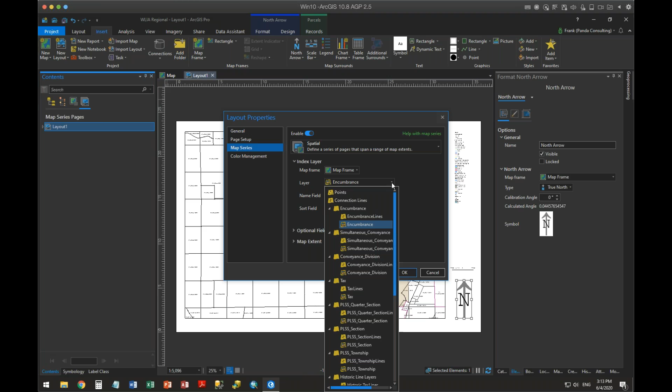And then what layer do I wish to use for my index layer? An index layer is a series of polygons that are used to define where those pages are going to be. In this case, I'm going to use my PLSS layer here. And then what's the name field? What's the name going to be? What's the sorting field on here? And I can look at optional fields, for example. I can put whether or not there's groupings, whether it groups these into individual ones.

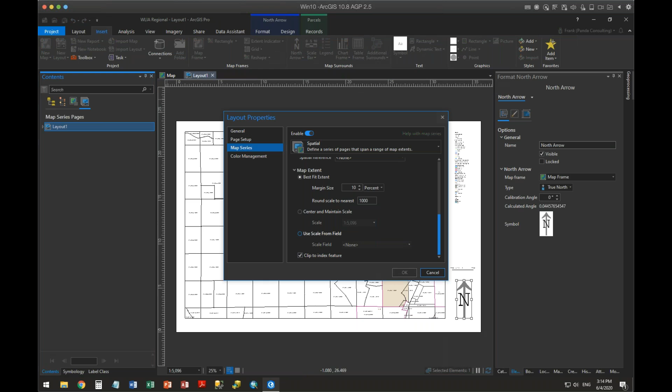I can look at map extent and it'll tell me, okay, how are we going to handle the map extent? If I want to be centered and maintain a certain map scale, I can click here and tell it what it is. I can say get it from a field or clip to that index feature. Right? It used to be that you had to go through some tricks to clip things. Well, now I can say clip it, but make sure I've got a 10% here. All right. And then I can click OK on this. And there we go. Click OK on this. And in fact, it creates my map series.

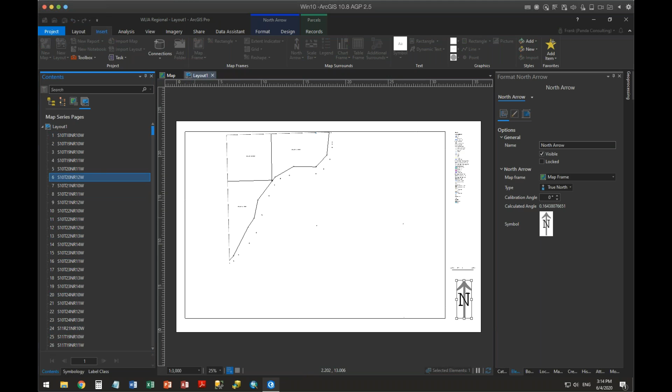Works pretty much the same, but there's that little key. How do you turn that thing on? It's not obvious. So now I can go down here and I can click on this page and it will pull up that page. And if you note, I told it to clip anything outside of the section is what I did on here. So you're only seeing this one section here at a time. And again, you have the same thing with dynamic text on here. You can tell it what section this is by putting up the page name on here.

So again, it works pretty much the same as it used to inside of ArcMap. Again, it used to be called data-driven pages. Now it's called map series on here, but there's other enhancements. Wait, there's more. So if I go to geoprocessing, I can actually look to my toolbox, and there is now a cartography toolbox. All right, that is specifically set up for map series, which allows you to do things such as calculate adjacent

fields so that if you have dynamic text hanging around the edges, you can say automatically calculate what's on the right and the left and the top and the bottom of this, so you can go and put that frame up there. All right, so you can put that dynamic text and say, this is the section to the east here, this is the section to the west, to the north and the south. You can calculate central meridians and parallels if you want that. You can put grid convergence angles in, a UTM.

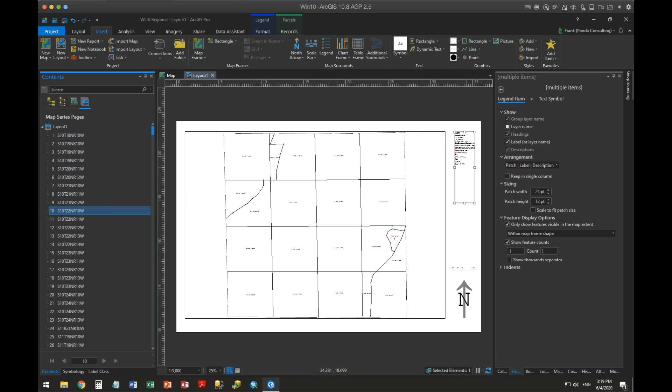It may be that someday we have to do a deep dive on this. Right now, I just want to introduce you to this, one of the things that's great here. They have made some really nice improvements. So if we go to another area here, you'll note my legend changed because I no longer had subdivisions in there.

All right, so are there any questions on the map series and some of that functionality that's in there now?

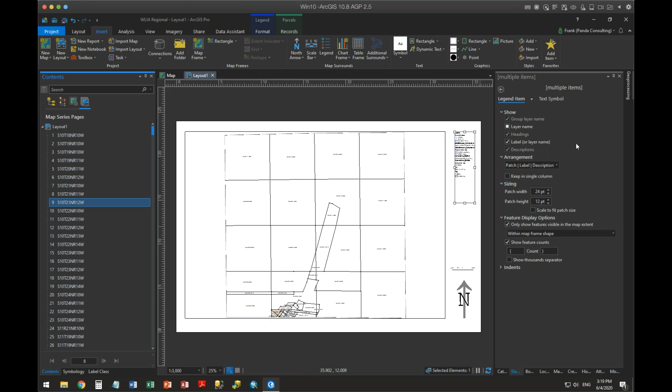So I could go in here and do this, let me see. I think I go to Share to go to printing on this. Let me see, layout, export this layout, no, print this layout. Since it is a map series, what's going to happen? Yeah, I haven't looked at this very often, so I probably shouldn't have gone down that rabbit hole as far as how you actually print these things out.

But we can explore that at some other time. Your layout's on the right there. It's set to letter and portrait right now. So, oh sorry, thank you, thank you.

Yeah, number of copies, tiling, output, map series. There we go. How many pages I want to do, what ranges I want to do of them, print them to a file. If I want to go and print them to an individual file, then I tell it what the file name is. By the way, an interesting thing I found with Pro is that they used to have a pull-down where you would tell it what type of file it was. Now all you have to do is put the suffix of that registered application on there, so you would say, well, this is a PDF, and boom, it'll do that and go from there.

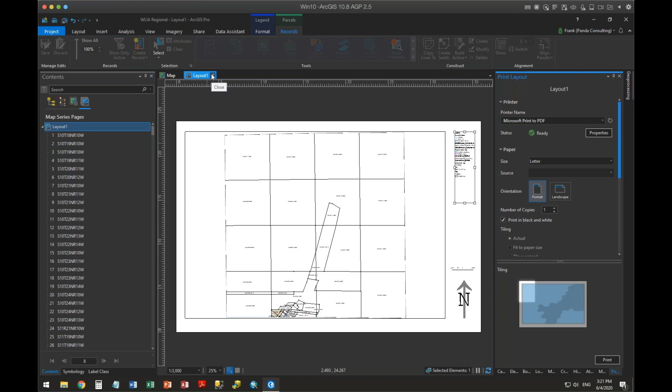All right, so I am going to remove this layout from here, and we will go from here. I can close that out. And now go back out to here. Let's go to this, go back to a view.

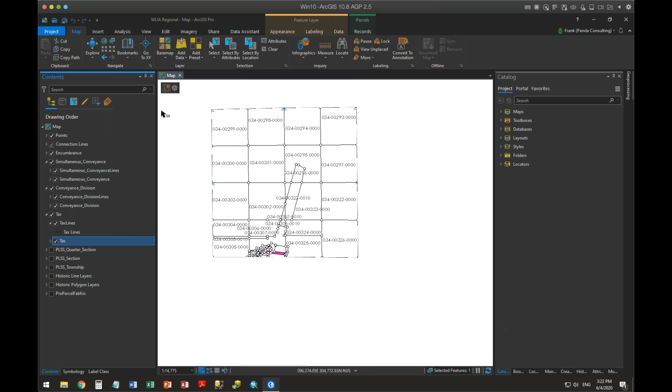I obviously was way out there before. Oh, this is interesting, I only get that one area that I just trimmed out. You're still clipped. I am clipped.

Exclude these layers, current map series extent. Let's... Oh, okay, thank you. I'm just going to cancel out of here, no changes, and go back in.

All right, Brian says it's not possible to convert a map book to a map series in Pro. However, the data-driven pages used to create the map book can be exported to Pro to create a map series. Right, that's kind of what I thought. It actually will bring in those data-driven page settings. Is that correct, Brian?

Yeah, all right. He says correct. Correct, awesome. Thank you, Brian. Yep, all right.

So the question was, what do we want to explore today? My thought is that one of the things we might explore is the Traverse tool a little bit more. A lot of us do a lot of editing and such on here. The other option is that perhaps we can explore a little bit more about correcting misalignments and things of that sort.

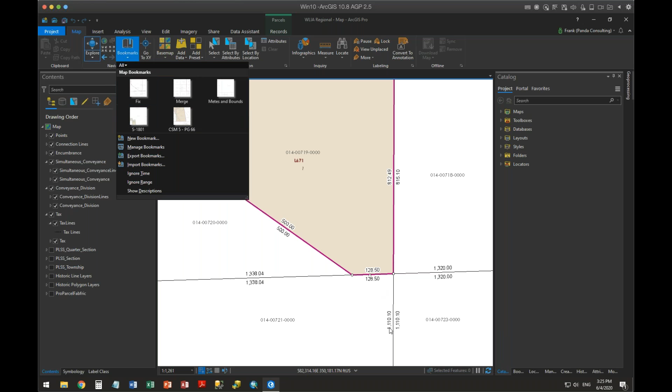Let me see if I have any bookmarks in here. I have a fix for this. Oh, Chris says Traverse first, then alignments. Okay, looks like we have more votes for alignments though. Yeah, let's start with real simple things.

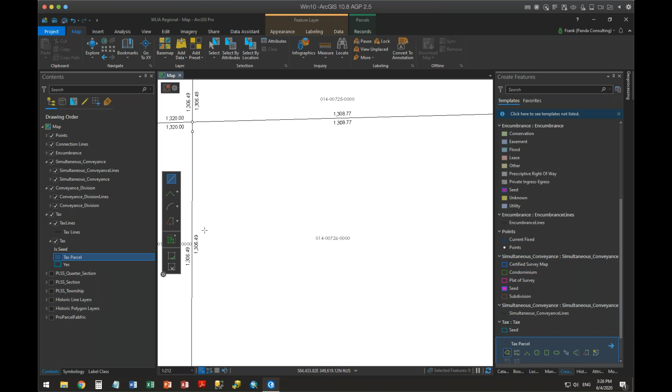Let's go ahead and I'll create some pseudo misalignments in here. I will go in here and create some polygons. I will create tax parcel polygons, and I'll create in here just some major misalignments.

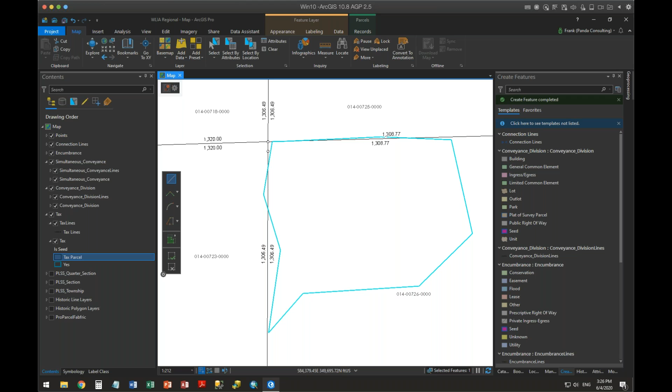So depending upon what you've done so far or what sort of data structure you're working with, some of this is fairly easy, some has specific tools for it. For example, I right now am in an ArcGIS parcel fabric, but I'm going to treat these just like plain old polygons since I'm not going to create any records, and say, how do I make sure these things align themselves?

So what I'm going to do is go over here and set this to be map topology under my edit tab. This is what I want to do - I want to use map topology on this. And when I go to modify, let's use the align features tool, not align parcels. This is our go-to for correcting misalignment areas.

Now this alignment tool also does things like replacing geometry, but for the most part we'll use this for correcting alignments. So the key here is you want to determine a tolerance, and I'm just going to put a 5-foot tolerance in here.

And then using my simple tools, I'm going to draw a line and say this line here, with a 5-foot tolerance - go ahead and realign all vertices that are within 5 feet of that path I just drew and bring them in.

I'm first going to create this down to 2, just to show it. I'll go back and do it again at 5 to show you one of the problems you might have. So at 2, I have options - almost always you want to fit your shapes to the path. And then on each side, do you want to go on both sides or one side? This is pretty advanced.

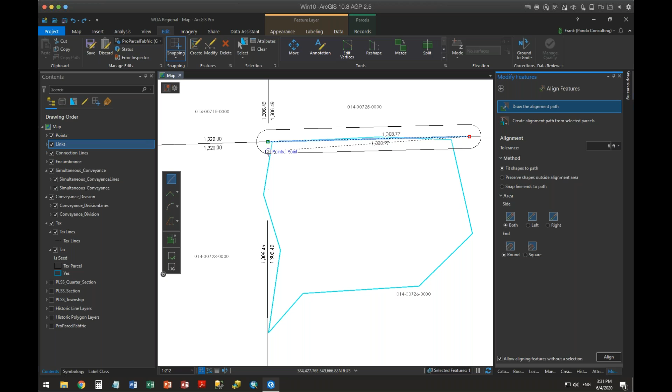Now notice when I move that buffer out to 5 feet, there's another vertex there, there's another point there. And when I click here, it's going to go - actually, let's go back to edit vertices here. It actually eliminated that vertex there on here. It didn't just move it in there, it eliminated it.

Now, because it should not have allowed me to do that because I got rid of a line. Wow, all right. So again, you want to be careful with that because there are certain rules - if I go and eliminate... well, I didn't have a record on. Sorry, I'm thinking to myself as I'm going through why it's doing that.

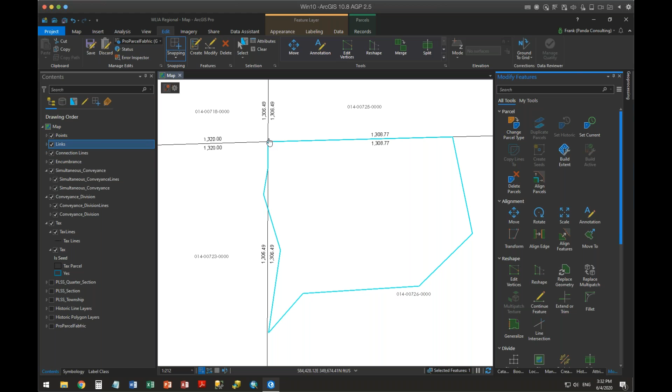So when I did that and I included that outside, it eliminated all the vertices in there and it redefined everything in there. If I was actually doing this with a record, it would give me an error message saying you're going to be eliminating lines and you can't do that. So I have to be careful with that.

The align feature tool is actually very, very nice in that it kind of is a replace and allows you to go, for example, and take polygons that have densified curves and correct them. But there's other things that we can do.

For example, I can go in here and I'm going to move back to map topology here. And instead of doing align features, I can do align edge. Now, align edge actually utilizes map topology to go and make sure that when I get in here, if I'm zooming, it's going to take whatever the solid line is and move it to the dashed line.

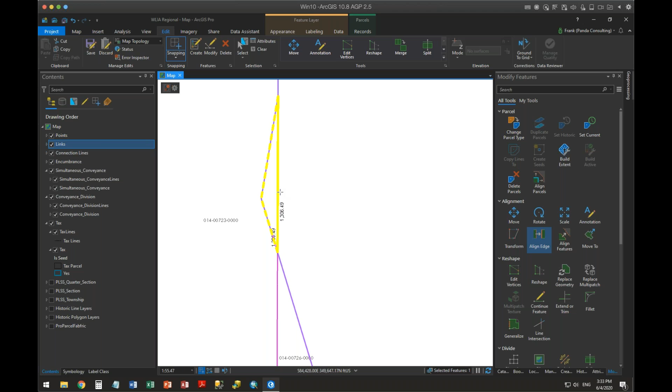So in this case, I can click here and it will go and move it to that line. Since this doesn't intersect, when I click on here, it should give me an error message because it should say it's eliminating this thing on here. Let's go and edit the vertices here. Let's make it so this thing intersects.

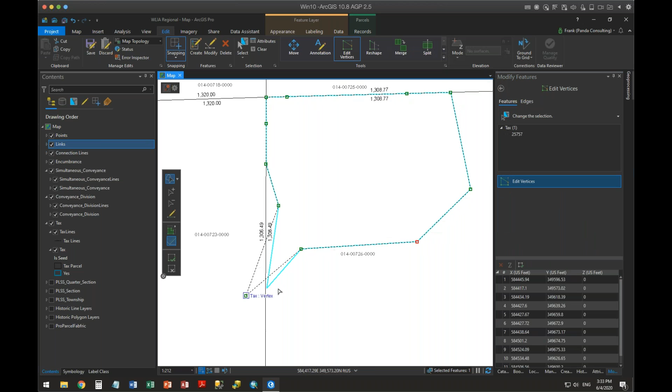All right, now go back to align edge and we can see it again here. When we hover over this line, it shows us that the solid line is going to move to the dashed area. So in this case, that will move there and this will move there. So the align edge tool is actually very nice if you've got gaps or overlaps between elements to allow you to go and align them up perfectly.

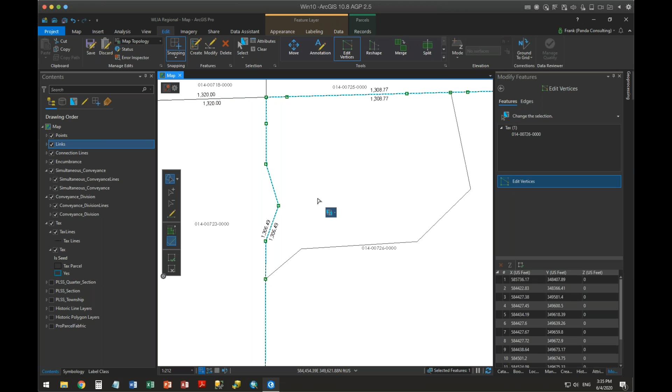And it will align it up sort of like autocomplete does, but it goes in and migrates it. So a question that I think somebody should be asking is, what did it do with the vertices of these? And in fact, you can see that it replaced any vertices and added vertices on them as it was going through.

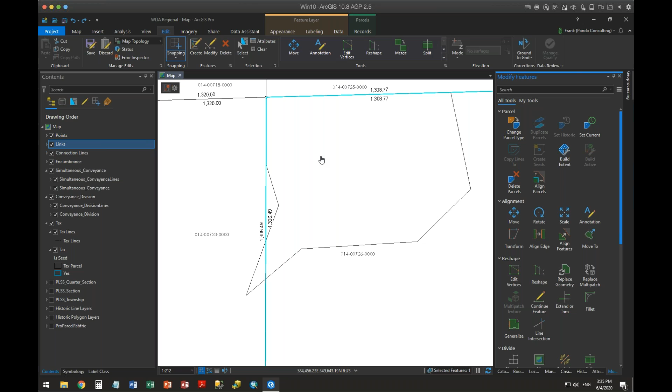So no, let's not do that. Let's just undo here. So are there any issues with or any questions about align edge or align features? Again, we love align features. It's a great tool and it works all the way through. You don't have to go and actually select anything. You draw the one path and it will go and align them all for you.

Okay, so the vertices are totally replaced. The vertices are replaced with align edge. All right, basically it creates a new edge for you. Let's sort of experience this one more time. Let's create a couple more in here.

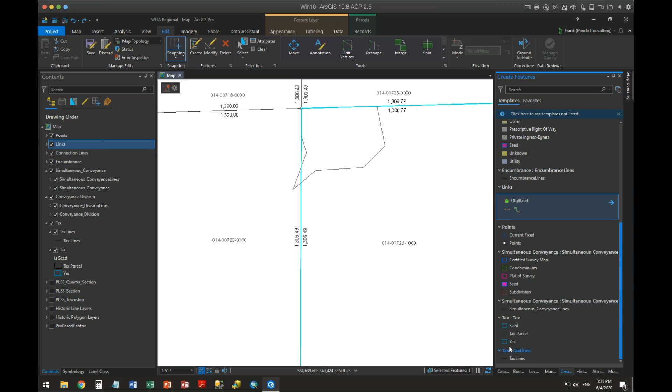All right, so again, this is using map topology when you're doing this. So when I click back here on align edge, it does an evaluation of everything that is in my current drawing extent. And then I can go in here and say, take this and combine it to here. This actually goes over this way. This will go over here. This goes and eliminates itself. This goes to here. This goes to here.

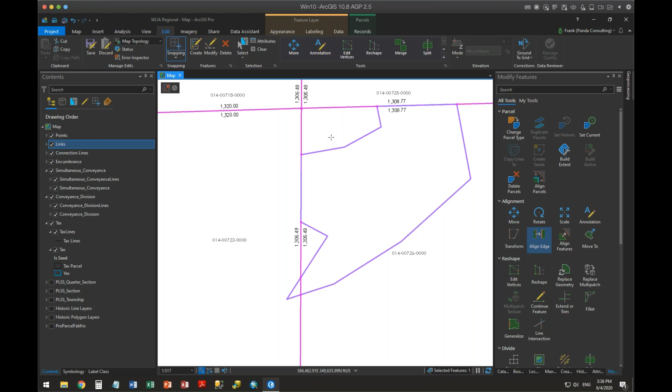Now you'll notice one of the things that I did is, because of not paying attention or however I do it, I can actually delete polygons out of this by using align edge completely. You want to be very careful with it. And one of my suggestions is if you're going to use align edge a lot, make sure that you symbolize the inside of those polygons. Make sure they have a color on them so that you can see when it disappears.

From experience, you could be aligning things that are hollow, and you don't recognize when polygons will completely be eliminated out of what they are. You want to be careful with that. Align features isn't quite as bad with that.

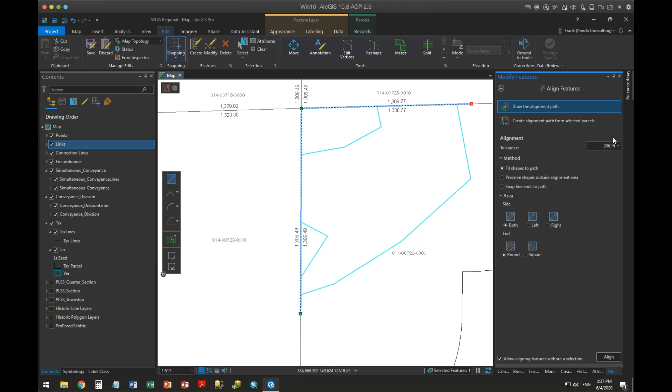Again, if we do align features, we can go ahead and draw a line here and say here to here to here. And then let's make it really ridiculous. Maybe too much. Yeah, 75 feet. And it's going to take every vertex within there and realign them to fit there. And obviously it won't, because it's deleting a lot of things in here. So this is actually telling me that it caused a feature geometry to become empty, meaning it is actually deleting some of these things that are in here, and it won't do that.

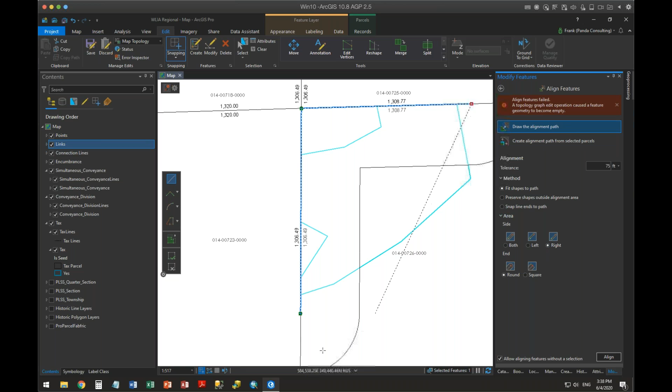What if you tell it to only use the tolerance on the right side? Try that. So in here, if I tell it only do the tolerance on this right side, go ahead and do that. Again, nope, it's coming up with the same thing: empty geometry, and I think it's empty geometry for some of this in here. All right. At what point do we stop using that? There you go. I think it was this area here that was causing issues.

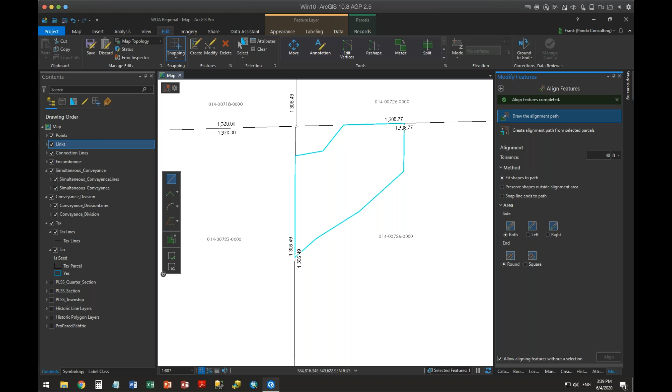All right. Again, Align Features is a really nice tool. We've used it a lot on here. And what it actually does is it eliminates the vertices or moves them over depending upon how those features are defined. And it works on lines, polygons, and points. You see that most of these points get eliminated, but let's see if I can go and find a bookmark here.

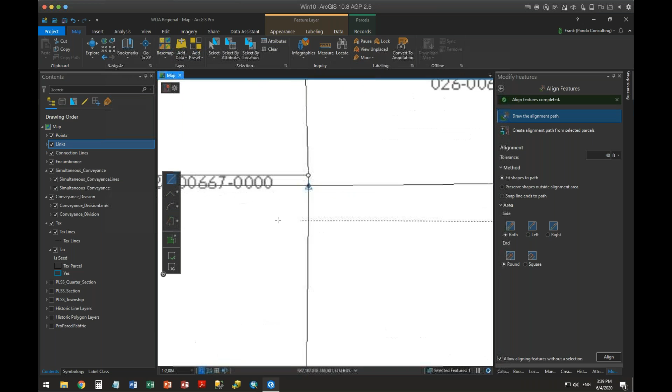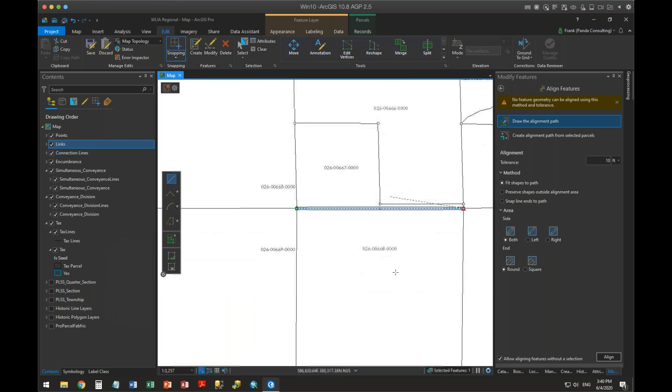This should give us an error message here. So if I go in here and draw this and say here to here, it gives me the error message saying, nope, you can't do that. If I go in here, no features can be aligned using this method. Let me make sure that I'm on map topology here. Here we go.

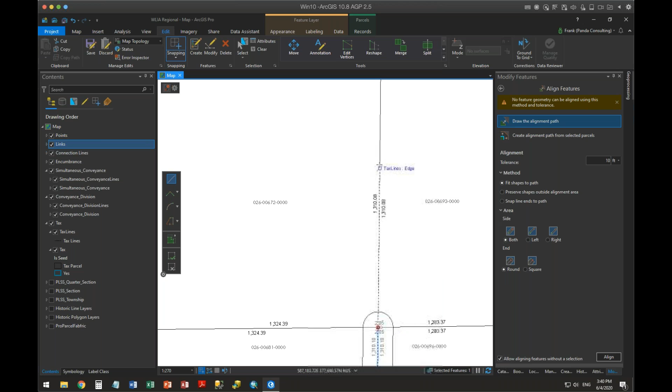Again, it's catching it and saying, you're eliminating points in here, you're not going to be able to do this. All right, you want to be careful with that, because again, it won't let you just completely remove things in there. We have here bookmark for fix. I think I actually fixed that already.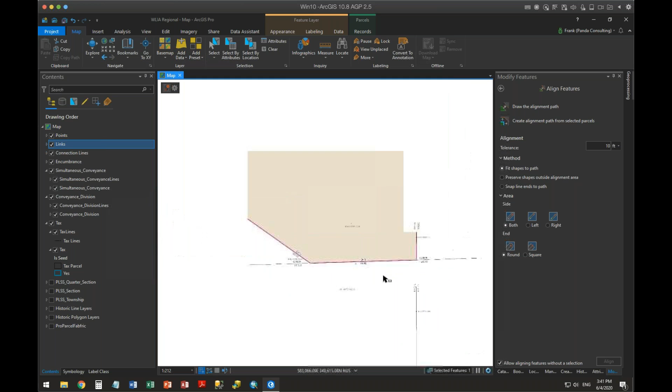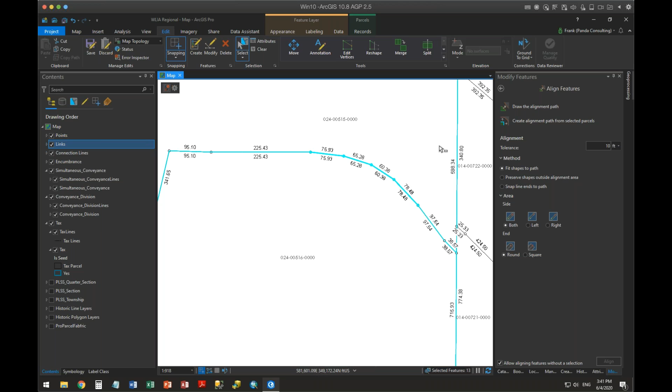I know in this data set there's a lot of elements in here. Here's a good example though of using that feature alignment to go and fix this. So what I'm going to do is I'm going to select these lines and points in here, and I'm going to delete them. Only because if I try to do a feature alignment on this, it will not necessarily eliminate those lines. It'll give me errors. So I went and deleted them first.

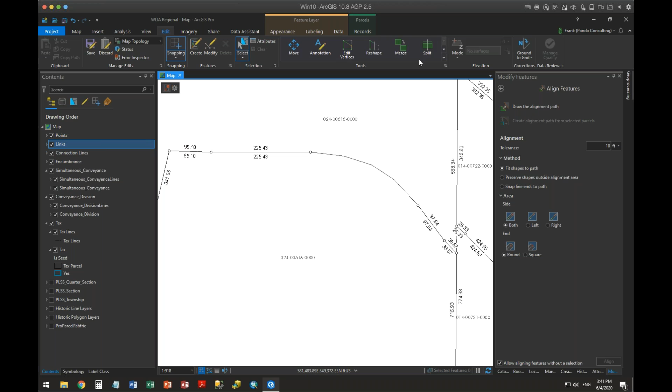Then I can go and do align features, draw a curve out between here and here, and do curve fitting here. Say go ahead and align that. I now have a true curve there. If I want to go and look and see, there's a true curve there, there's a true curve there.

So I can actually go in here. Again, this is a parcel fabric, and tell it to go ahead and rebuild and create my lines for me. And I actually have lines there now, together with these 2 points on here to prove it.

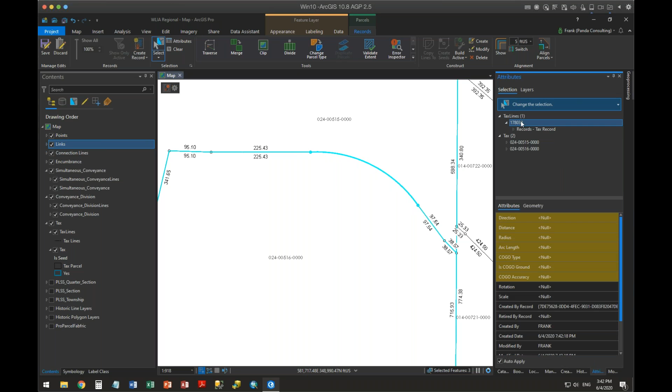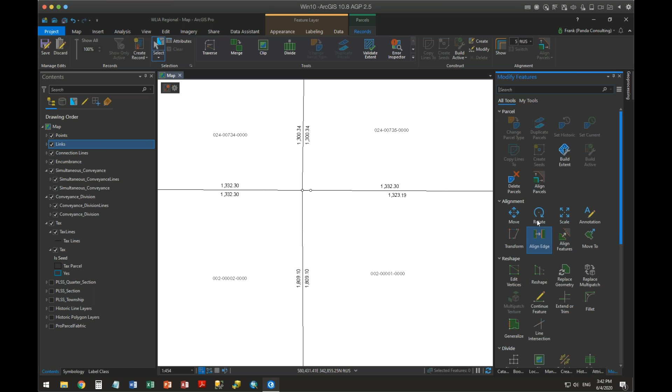There's my line that it built. All right. So getting things in alignment and cleaning them up is really dependent. You're going to use those two main tools in there. You're going to use the Align Edge tool with Map Topology, and you're going to use the Align Features tool when you actually draw the path on there.

All right. Do we have any questions on these two, on any of those? Nope. None yet. None. Okay.

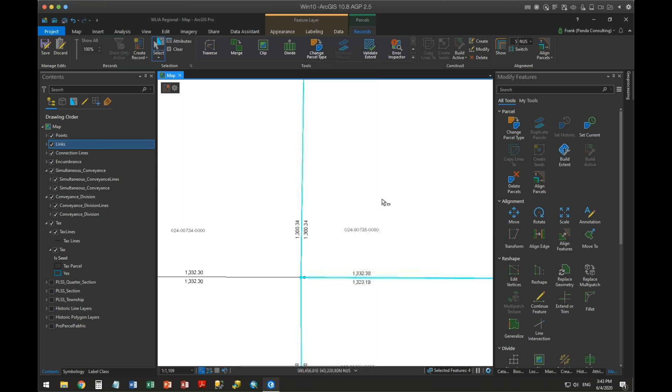So let's look at the Traverse tool again. And I'm looking for an example. Okay. I'm going to use the Traverse tool. Now with the Traverse tool, the first thing you're going to want to do is set what types of lines you're going to be creating. And this drop down will only show you the lines that are turned on at the moment. Matter of fact, if you notice, it didn't show me any of the PLSS lines because they're all turned off right now.

But I can do that, and I can set the starting point of this, and then I can input my bearings. In this case, let's do it the old way. North, 90 degrees west. All right. And let me see what this distance is. Okay. And then I can go 500 feet with that. And then, again, I can put in a shortcut and give it the degrees.

Let me get the degrees and then a period, number of minutes and number of seconds. I don't need to put those in if it's 0. And then I can tell it what quadrant it's in. So I'm going to go south here for 50 feet. And then I want to go 45 degrees southeast for 400 feet. Then I want to go 90 degrees east for 250 feet. And then I'm going to go back to my closing point.

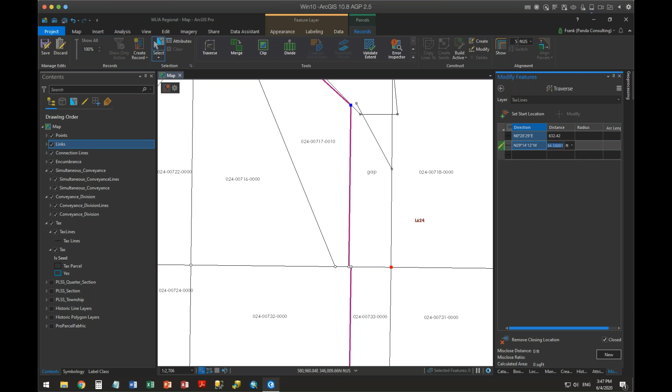If I wish to create a new set of lines, I can go in here and say, here's my new set of lines. I'm going to start here and go up here. And in this case, it's supposed to end here. So let me set my closing location as being here. So this is a closed traverse, and, oh, I don't have any values in here. There you go. Since I have values in there, it will adjust between what I had input and where it's actually supposed to be closing, because it is a traverse with a closing position on it.

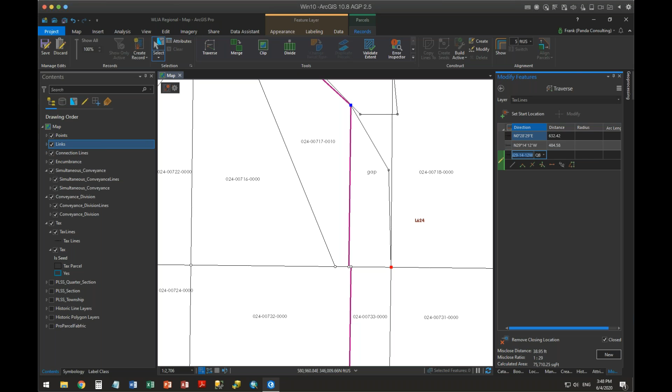And you'll find often while building things that maybe that last point didn't close where it was supposed to. You can always set your closing point to join to that final location. Say, for example, let's eliminate this. Let's go back to here. One more. So let's say I wanted to start here, and I have a bearing and distance that says it's supposed to go to here. I could input this bearing and distance and say, no, this is actually supposed to go to this location, and tell it to close to that location.

And you'll find that when you're building subdivisions and building lots off of a subdivision boundary, because of the inherent rounding errors, you'll have to use this quite a bit to make sure that the record distance is shown at that location. You do have options though. Rather than using the traverse tool, you also can go in here.

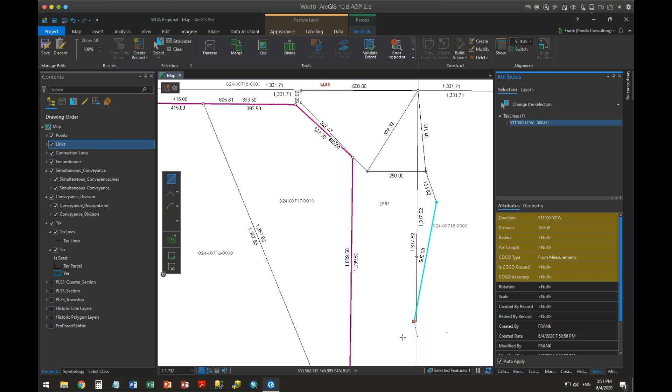I might be building a traverse that has curves in it, and I'm not sure of certain elements on here, so I can do a spiral or a circular curve and say, what is my tangent bearing? In this case, my tangent bearing might be 45 degrees southwest, a quadrant bearing, and tell it that my radius might be 150 feet, and my arc length or my central angle might be 90 degrees. And you'll note that it's actually showing me the display of what this curve is going to look like.

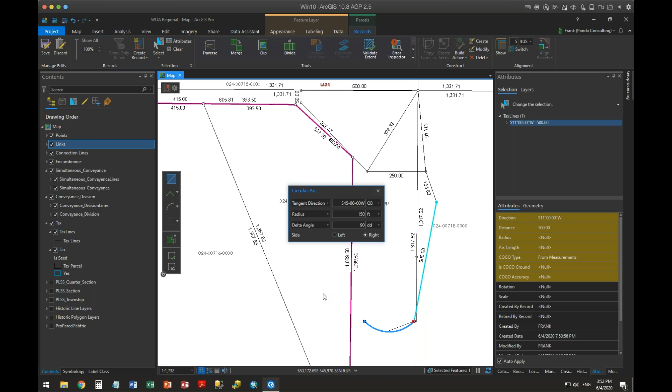So in the traverse, when I create a curve, it doesn't show me what that is until after I hit return. I could go back and fix it. But if I use this constraint, which is part of the create lines element, I can actually see beforehand what this curve is going to look like and realize, is this going the right way? Or maybe that was supposed to be to the left instead of to the right. And I can hit return and it will go and finish it out for me. All right.

So there's a lot of ways to input lines in here, both with the traverse and just with these constraints. Again, the constraints will allow you to do a direction, so you can actually preset the bearing, or the distance. The distance, I can tell it that I wish this to be 200 feet, and it will constrain this so that it's only 200 feet for me, similar to the constraints that were in ArcMap.

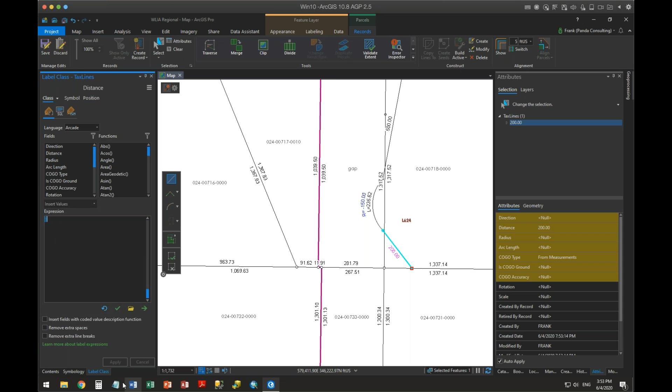Note, the label on this line, however, is pink instead of black. Why is it pink? It's pink because the label is set up over here. Let me go and do this. We're not going to study all of this, but we are going to look at some of it. Here's where it actually calculates the azimuths and converts them into degrees, minutes, and seconds. And the validity, it tells me whether or not, let's go up here a little bit more.

The distance color is black, radius color is blue, curve parameters are black. Partial curve or partial COGO, it actually provides a magenta. So it depends upon, in this case, whether or not the direction field is filled in, whether this is pink or magenta, or whether it is black or blue. So if I go in here and I take this,

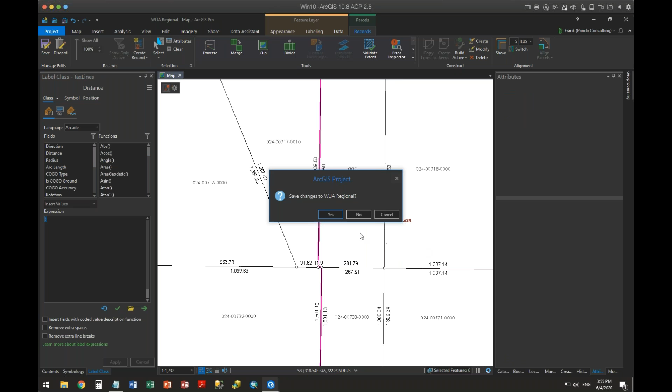yeah, thank you so much. I guess when I got out of here, it got me out of here and wanted to save it. Sorry. Sorry about that. Because I had saved nothing, it's gone. Well, let's do this again then.

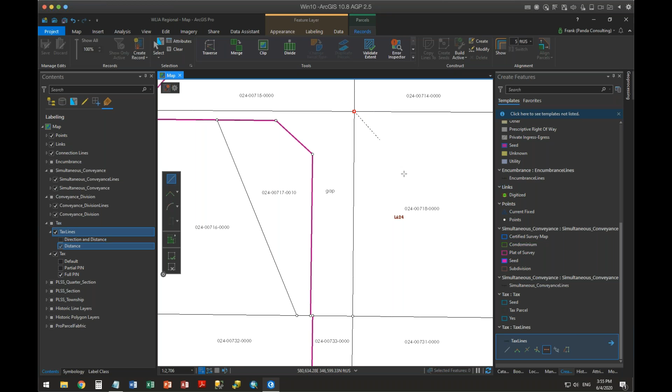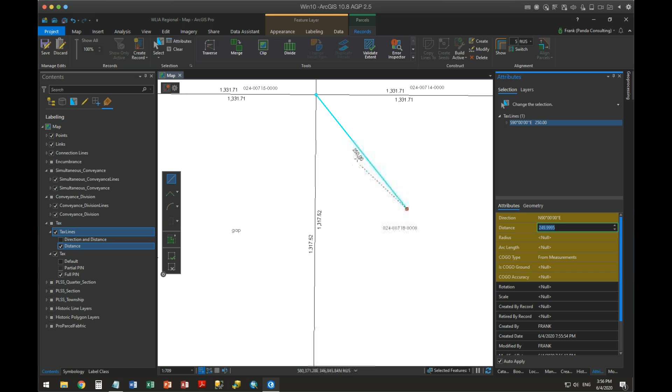So if I go in here to create and I go down here, here's my tax lines. And if I use distance 250, and that 250 is magenta, if I look at the attributes of that, since I do not have a bearing on here, it's magenta. If I put a bearing in, it doesn't matter if it's a valid bearing or not. As long as there's a bearing in here, it will change it from magenta to blue or magenta to black.

And if I have both the bearing and the distance displayed on here, it will show the bearing in blue, the distance in black. All right.

So, by the way, if I input this, it says it is from measurements. All right. If I go in here and do this, and I put in here 100 feet, it does not set the COGO type in here. We haven't talked much about the COGO type yet. The COGO type is set depending upon how you go and input that line.

If I go to a traverse now, and I go to tax lines and I say I want to go here, 90 degrees for 200 feet. All right, and I click off of here and select this. It will say that this line was from measurements because I actually went and input that line in.

But if I go in here and do this, and then go back here and say calculate COGO. This now says that the information that was stored on there is from geometry, not from input. All right.

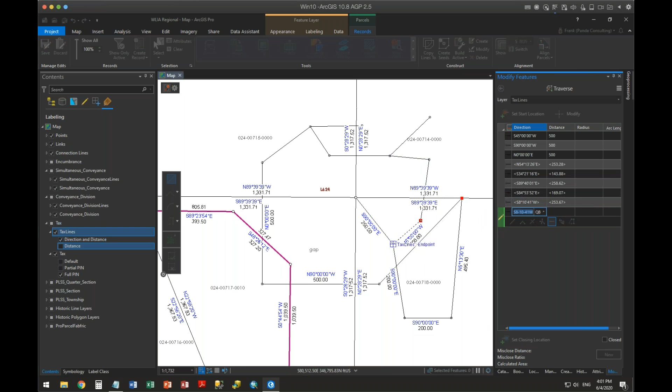So I can go back here now, and some of the early things we were dealing with was, how do we do this? Do you want to save? I can say no, don't save yet. I'm actually putting in there, do I want to save? No, don't save yet. So I still have that ability. By the way, it's counting 1 action, 2 actions. That's why it's doing it there. So I can tell it, no, don't save until I'm actually ready.

But you just want to be careful. We've found that it just wasn't a good option to have it save these edits for us. Rather, we just want to be careful and make sure that we do save when we're ready to commit these changes. All right.

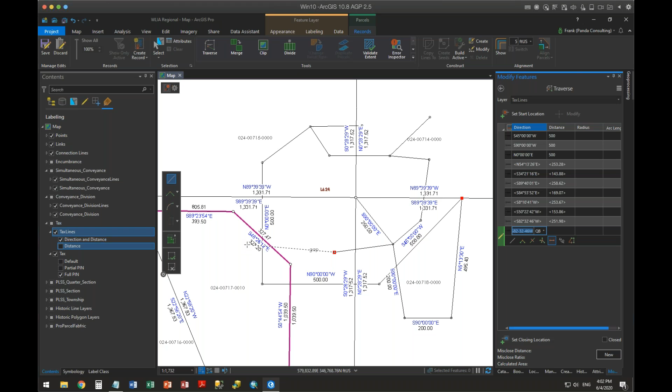So what else do we want to talk about today? What questions do we have? What things have I shown you that you have questions about, or what things have I not shown you that you want to talk about today? Everybody's quiet. Nothing so far. All right. Christopher, can you go over some of those original questions we had to see if any of that will help? Let me look them up. Thank you.

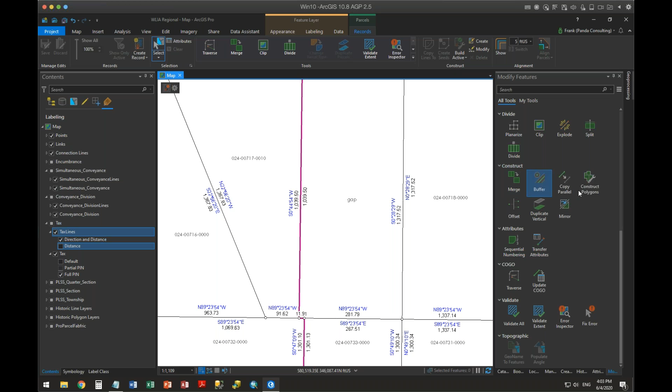If not, what we might do is we might go through some of these other elements in here. So let's just go and do this. We could do this for a little bit.

Frank, Victoria wanted to know, how about importing a CAD file? I don't have a CAD file. But importing a CAD file really is pretty much the same. You bring a CAD file in. Maybe next time we'll look at that. CAD files look a little bit differently in ArcGIS Pro than they do in ArcMap. But I don't have a CAD file right now. So we'll look at that next time.

And you can feel free to use my data too. You have a copy of it. Do I? That's Wisconsin. Yeah. That's Wisconsin. Oh, you're right. Sorry. Sorry about that. It's not synced from my cloud storage. Sorry. But you can save it, and I can send you a CAD file if you want.

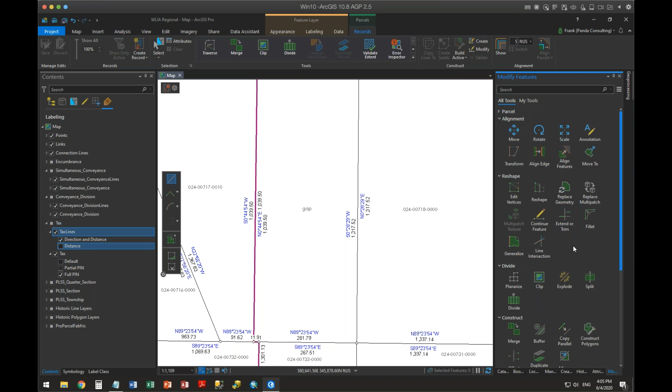Okay. So let's look at some of these other options in here. So we've talked about, let's sort of start going down through this. These have to do with parcels. I won't deal with that today. Rotate, scale. Let's just go over this one by one. So this should be create.

So when I create a line feature class, I can take and I can move it. Again, this is the anchor now. So if I hold down my shift key and move it around, I can then take it, as long as I'm selecting on that feature, and I can tell it to snap at that point. I can say, go ahead and move it. I have to hit plus.

Same way with the rotate. I hold down my control key, tell it I'm going to rotate it around there. And as long as I click on that feature, it will go and rotate. As soon as I hit plus, it will go and save it. Let's try that again, because maybe I want to snap this to this line.

Well, while I'm in a rotate, if I hit S, it will give me a second snapping anchor, and I can hold the control key down on that and tell it to put it on the line, or actually on the end of the point. And now when I move my cursor over that feature, I can rotate it and snap it to that point there, or snap it so it's coincident with the line, and say, go ahead. Let's undo this and do a scale.

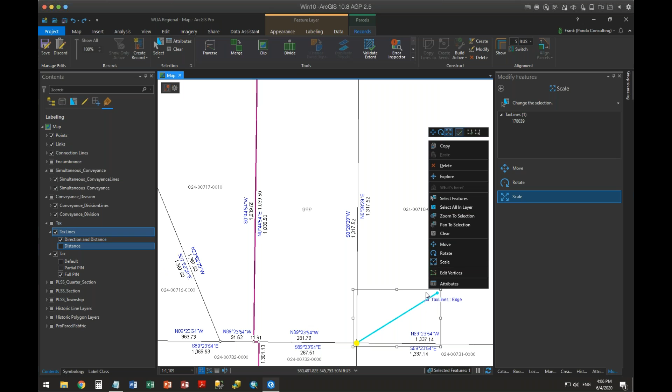So with scale, again, I can say scale it from there. And I'm trying to think whether I have that option here. I can scale it up or down to fit within a certain area. And I don't think I have scratch topology now. So there it is there. So those are sort of the standard types of movement on here.

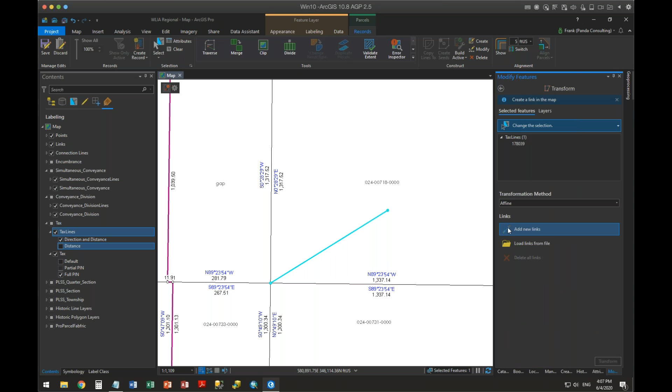Transform again is pretty interesting. You've got to have linkages. Say I want to transform this from this point to here and this point to here. All right, and then I can tell it to do one of 4 types of transformations. I can tell it to do a similarity transform. I can tell it to go and do a rubber sheeting.

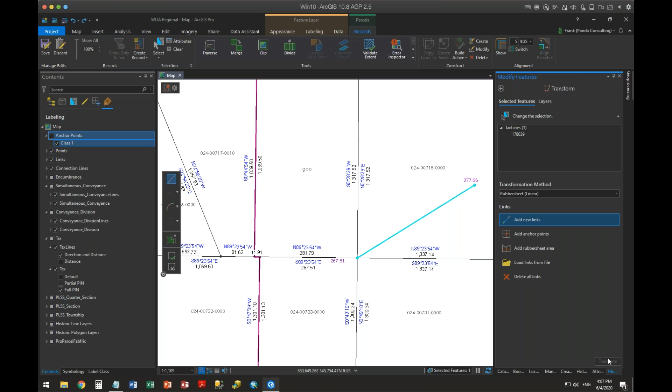And these mean a little bit more as it relates to polygons, as far as whether it keeps the overall shape. Or I can tell it to go and do a rubber sheeting with natural neighbor and do a transform that way. So it pulls things over and transforms them in that way. So transform, again, is the ability to move something and have it snap to certain locations.

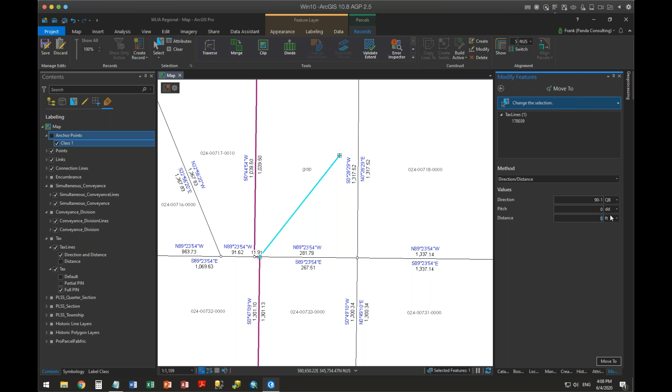Align edge, we saw. Align features, we saw. Move to basically allows you to do either a dx, a delta, where you can change it so many feet this way, so many feet this way, or you can change it by direction and distance and say, I want to change this location to be 90 degrees north, and I want it to be moved 50 feet north of where it is now. I can say, go ahead.

Actually, that was 90 degrees, so it was east. It went 90 degrees east, and it moved it to there. So it allows me to move whatever I've selected a set distance.

All right. Frank, some of the questions we have on this list are, how do I create a catalog pane? How do I set the folder connections? These are things that we haven't touched on yet. Those are good things to talk about. Got some time here, we can do that. So again, I'm going to do a poll here. Do you want to continue going down the list of the tools here, or do you want to talk about the more basic things, creating folder connections, setting up panes, those sorts of things?

Tools or panes? Tools. Okay, so we'll keep going down the tools.

All right, so we've gone over the alignments. Is there any questions about the alignments in here? I mean, they're pretty simple.

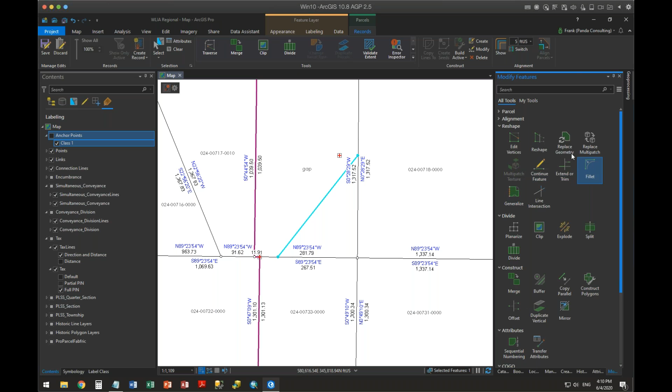So what about reshape? Reshape allows you to go, and again this is edit vertices. And when we have edit vertices, it will take whatever you've selected and allow you to do things such as move this vertex. It allows me to go, for example, and right click in the middle here and add a vertex.

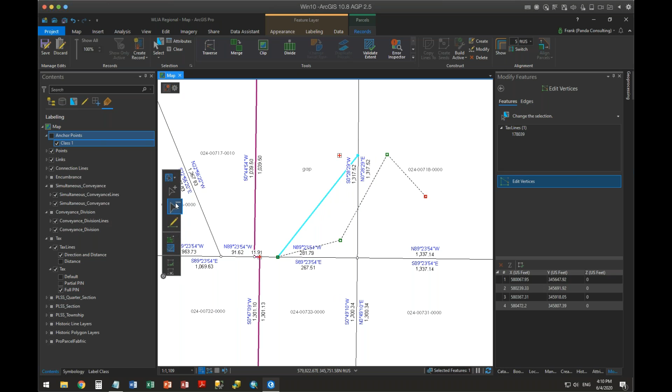I can also use this tool to go and add and delete if I want to delete them. It actually uses the lasso instead of just a right click to go and do that. This is the standard, this continue feature on here, and I can do it that way.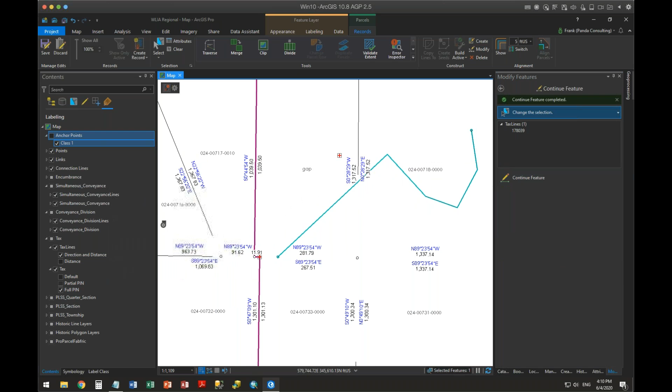I like the edit vertices tool. What I don't like is that you have to click off of it for it to stop working. Otherwise, anything you select will automatically be edit features on there. But it's a nice tool.

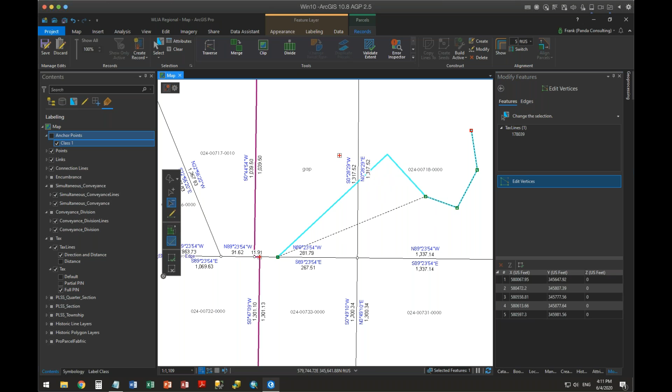Takes a while to get used to just this, going in and drawing a lasso instead of going and just right clicking and doing it on there. But it's an interesting element on here.

Reshape. Reshape allows me to go and draw a path, and that path will then go and reshape whatever I have selected to that path.

At 2.5, which is what I'm using here, you actually have to intersect that path. You have to intersect that feature twice for it to go and do this.

So for example, I can't just go and do this - it will give me an error message. Instead, I have to go and intersect it twice so it understands: go from here up to there, and then down again. You have to intersect it twice.

I can tell you that coming up is a new element in the reshape where you may only have to do it once, or it may be able to go and say, okay, now put that here, and it will go reshape it from that point over and do everything there. That is one of the changes that's coming in here.

Replace geometry. It will basically let me go and do that same sort of thing and just put the new geometry in. It will take whatever the old feature was, with the attributes, and move it over to the new feature on here, including things like polygons to be able to go and reshape polygons in here.

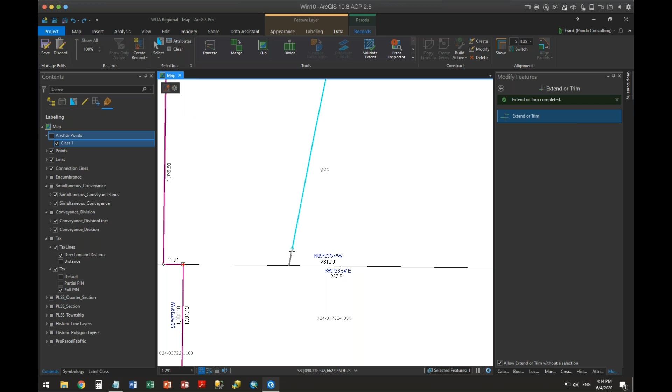I did it the wrong way. I collected on here. I can do it there. All right.

So I kind of like the way it works. I kind of like this allow extend or trim without a selection on here. I've gotten used to it as we're going through here more and more. Any questions on that? Nope.

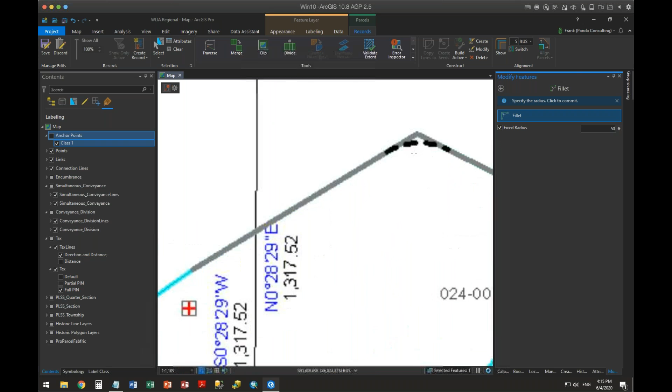Fillet tool. Let me see if I can do this. Yeah, this is here. I can tell it either by drawing this, or I can tell it to put a 50-foot radius in here. And again, as I zoom in, I can tell it which quadrant to put that in to do that. So fillet here and here, and it should automatically trim that for me.

Brian asks, what about a duplicate or a clip? Duplicate or clip - clip's coming up. It's right there, the clip is coming up.

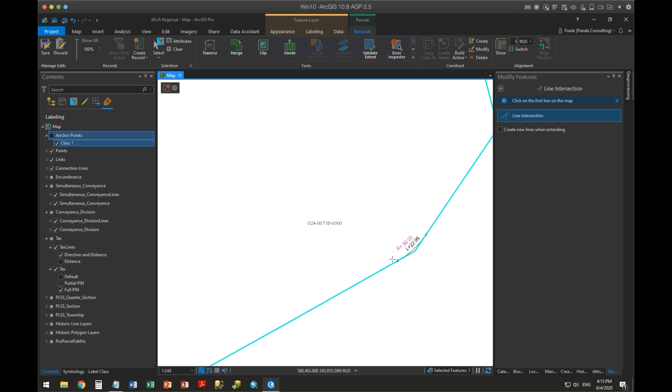Line intersections - if I have a series of lines, let me go and create some lines here. I should just turn all this other stuff off.

Ruben asks, what's the best tool to deal with slivers - to detect them or fix them, basically? Detecting's a little bit tougher. You're going to wind up having to do a selection. What we're finding is that if you start looking at the most basic attribution, what's the area of a sliver? Is it a small area that's less than, for example, your normal parcel size? Start looking for those small parcels and then go find them.

If you have topology rules, you can also look for things such as - and a sliver doesn't qualify as this - gaps, where you don't have a parcel that's contiguous. That might be a gap.

But slivers - let's see if I can create something with a sliver on here. Let's turn this other stuff off to make it easier.

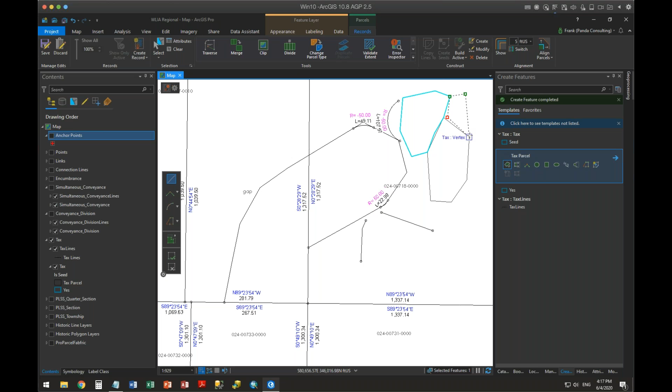So here's a classic type of element on here. These are all gaps, even though it looks like they're slivers, but these are gaps. So let's go and do one more thing here.

Let's go and create using autocomplete. Let's go and create - there's something underneath there, so it doesn't create autocomplete there. Let's just go and create one.

So that's a sliver on here. The issue you're going to have is identifying - is that a valid sliver, or is it something that needs to be merged together or eliminated?

So in a traditional sense, what you might do is say, well, maybe it is a sliver. And again, I've got stuff underneath here - it's a sliver, and maybe I also need to put these two and merge them together.

So I could go and - where's my merge in here? Clip, divide, merge, right here. I could tell it to merge those two together and then tell it which one to merge it into.

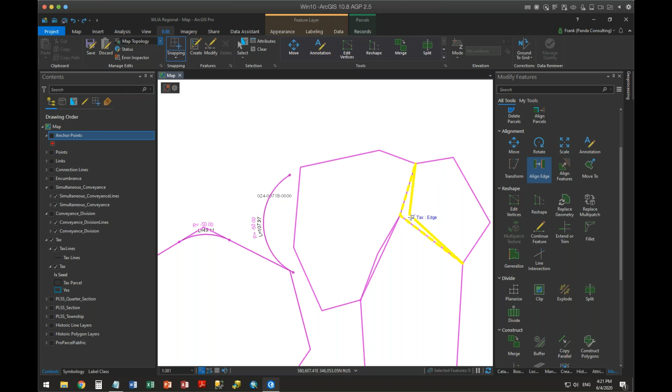Another option is you can go in here and do an align edge, in which case it takes this line and aligns it over to the other one. Oh, it's not going to let me do that on there, so I guess I can't do that either.

What else can we do? What other options? I think merge is probably the only one you're doing. So for example, if you have topology rules, it will often allow you to merge overlaps into other options. I think those are the best ways around it.

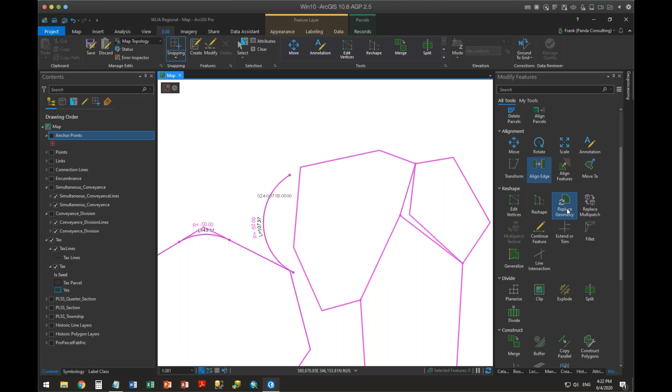If you've got slivers in here, and this is a sliver, I can easily go in and say just go ahead and merge that. I can go in here, and again because I've got one there, it's not a gap - it actually is another polygon in here. So I have to identify and either remove that or merge it into the adjacent one.

All right, Generalize, line intersections - I started doing something here with line intersections.

Line intersection. So with a line intersection, I can tell it to identify the intersection of those, and I can create new lines when extending, or I can just extend those lines for it. So I can tell it to go ahead and do that.

The question everybody asks is, well, what happened? And where are the vertices? Let's go and clear that selection and collect them separately. You can see it left the old vertex on there and just extended it.

That's all, so it didn't create new ones in there. But line intersection allows you to go and extend lines, extend curves till their intersection by basically adding a new segment onto an existing feature.

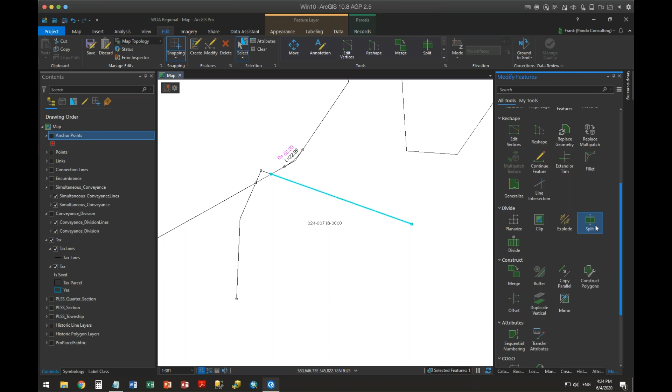It allows me to just go and interactively click on something to split it, or I can split by feature, where I can tell it I want this thing to split, and then I can tell it to be able to select what it's going to split out of here. So I can tell it to try to split the tax parcel underneath, or the individual lines here to split them.

These are already all been split, but it will do that. So again, I can do an interactive split, or I can say, let me identify what polygons or what lines it's going to cut on, as I go and intersect them.

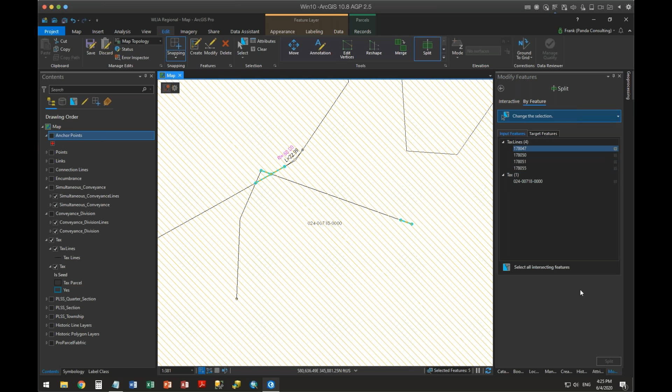Yeah, thank you, sir. All right, so this has been a real hodgepodge of things that we covered today. I'm going to discard this. All of those. So we covered a map series.

We covered some elements of the traverse, different ways to input things in the traverse, ways to input COGO values, what happens when you have full COGOs and partial COGOs. We talked about taking in a single line and having a closed traverse off of that, basically taking what we used to call an open traverse and then closing it to a set closing point.

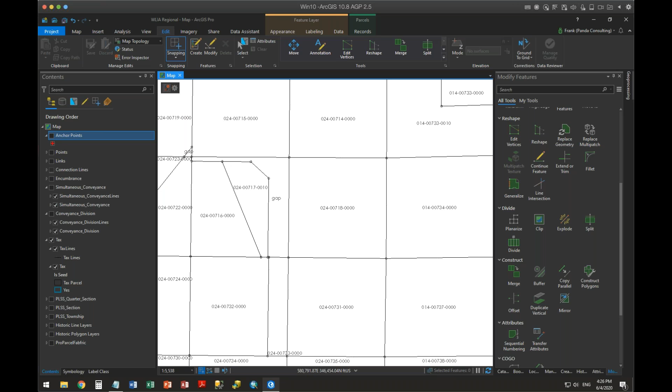We also looked at some of the alignment tools. We looked at some of the ways to go and realign some of your simple features in here. We started going over some of the tools and went over some of the adjustment tools on them. That's about all I have for today.

So the question is, and this is critical, what do you want to go over next month when we do this? As Victoria said last time, let's go over map series or data-driven pages. We can do that. Does anybody have something they want to go and review? Nothing in the chat. Nothing. All right, let's go ahead.

Set up topology rules and things like that. Could you please show how to start from the data model?

Kathy, can I ask you to explain that a little bit more? How do you create a data, or Kathy, can we unmute you? Are you unmuted yet? Sending unmute request. She doesn't have a microphone. Okay.

Yeah, we can explore that. We can talk about creating a database and what's involved in that and how to proceed with that. That's a good way to start. And then maybe we can build some topology on here.